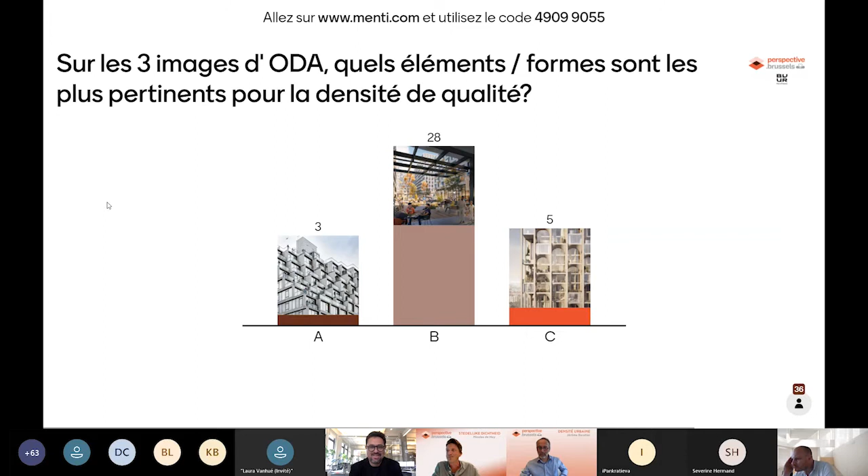Okay, well, maybe if you could tell us later on a bit more about project B, Eran, it'll be interesting to see why people are so drawn to it, maybe it's because they see trees, I guess. Maybe it's the best rendering. Thank you very much for this participation.

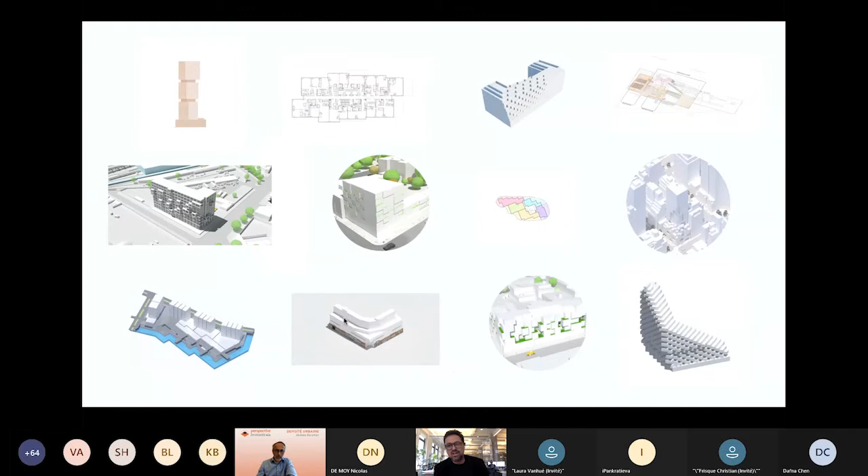...that we've been exploring the territories by which buildings can breathe, what we call the breathing room of buildings, territories where we can discover ways to expand our life and improve the qualities of our lives, starting at the very generic unit of living, is it apartments, to a building, to a block, and to a neighborhood. And it all started for me almost 20 years ago when I arrived to New York.

Basically with the vision of Jane Jacobs about the beauty in neighborhoods in New York, where there's a blur between the lines of privacy, intimacy, community, and public spaces, and how simple elements of architecture, like a window, a thick door, or a stoop of stairs, can become a platform for these kind of situations to be created, and how architecture can generate life that is intimate, familiar, but at the same token, diverse and public.

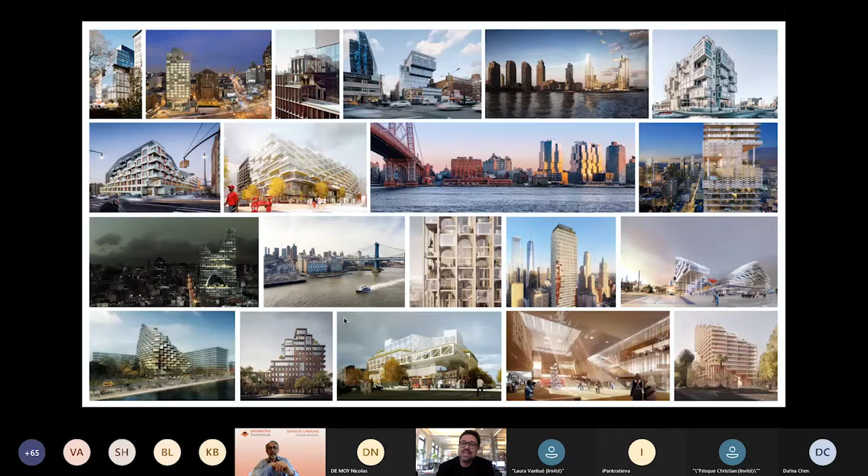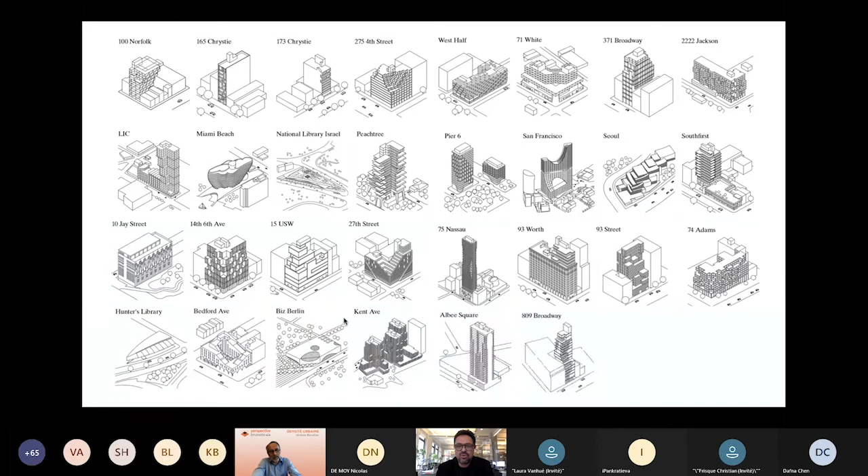And so what we go through at ODA is trying to imitate and maybe improve on these qualities as the city continues to densify, and those moments of intimacy at the streets are disappearing more and more. We've completed about 55 projects in New York City, and we're working internationally and around the world in diversified programs, scale, and geography. But what unites all of our work is the unrelenting desire to find formulas that improve people's life in cities, in every kind of function or every aspect of our lives.

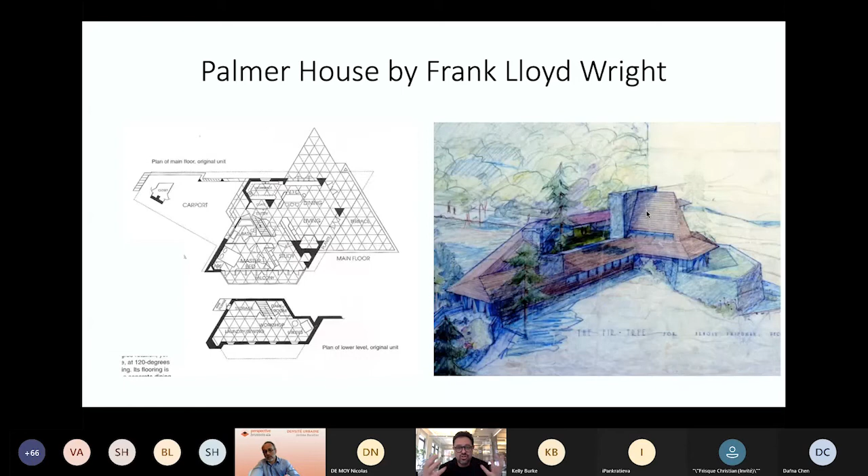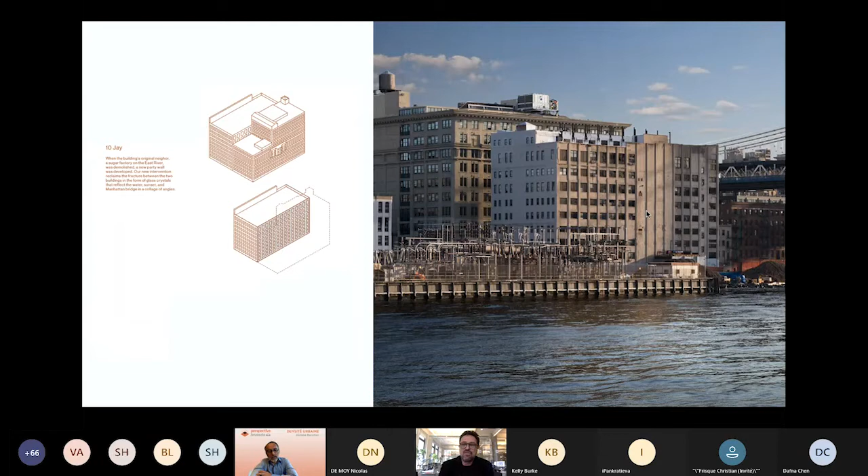So Frank Lloyd Wright, for example, built this house where from the pattern of the floors, to the column, the structures, the furniture, to the building itself, fractality is in play. We really like the idea of fractality in the city and the way it could reflect these qualities on humans. When we were asked to convert this fairly ugly building on the East River in a neighborhood called Dumbo in Brooklyn, we discovered that the building used to be a sugar refinery built by the Arbuckle brothers at the turn of the century.

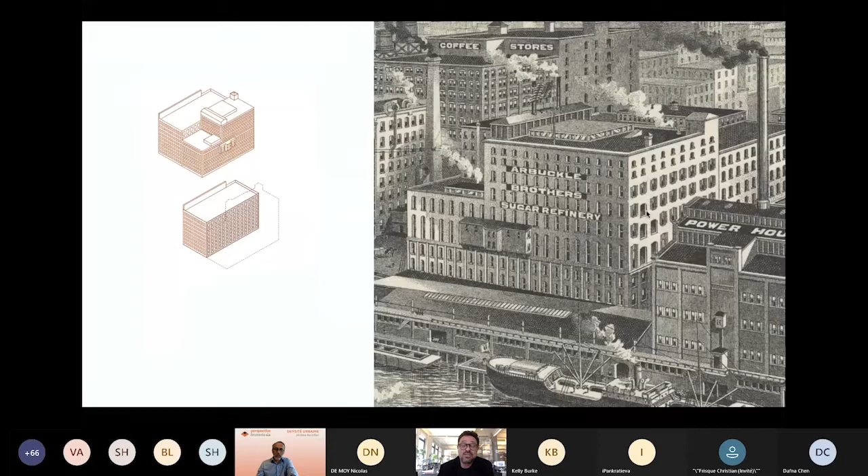And it was actually double the size. So sugar cane would come from Brazil on the East River, would download their product. The sugar cane would be refined and then continue north to Chicago through the Hudson River.

And we were intrigued by the idea of the fractal of a sugar crystal and proposed a facade that is highly fractal, a three-dimensional kaleidoscope if you will, that reflects the East River and Manhattan on the other side and adds a new level of complexity to an interchanging neighborhood with an adaptive reuse of an older building. We love that idea, and especially the way the modern kind of fractality adds to the overall context of the building on the waterfront.

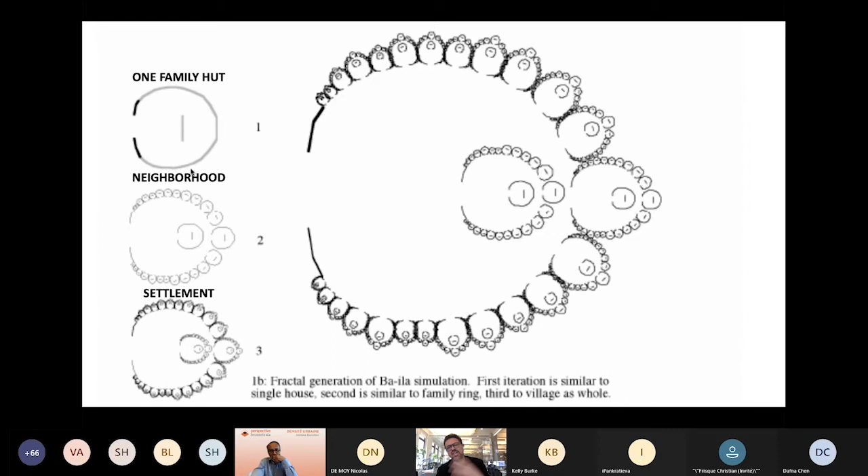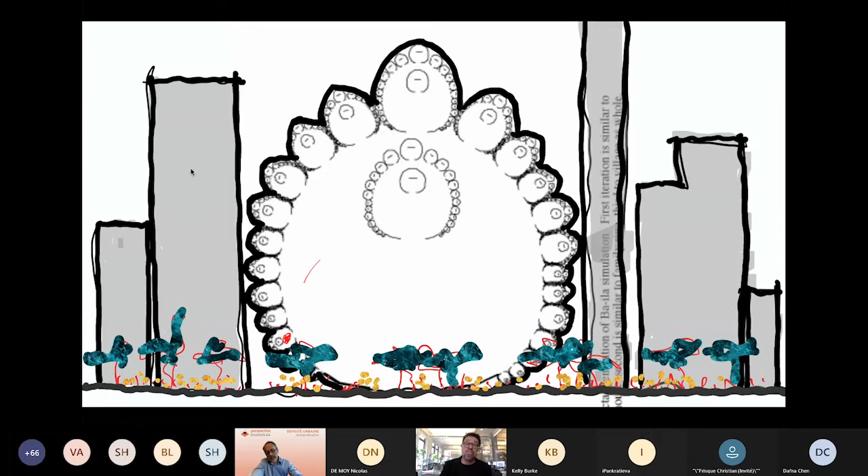So we're thinking, what if we take that idea and flip it and think about it as a building within Manhattan, such that the level of fractality would break the mold of the repetitive floor plates that just go on forever, and start to create fragments, small units of life that make our life within the building richer.

About 10 years ago, we discovered a small, very simple fact: that the zoning rules in New York City can allow us to take a typical building with a setback and rearrange what's called the dormer into a sort of random placement of fractal units.

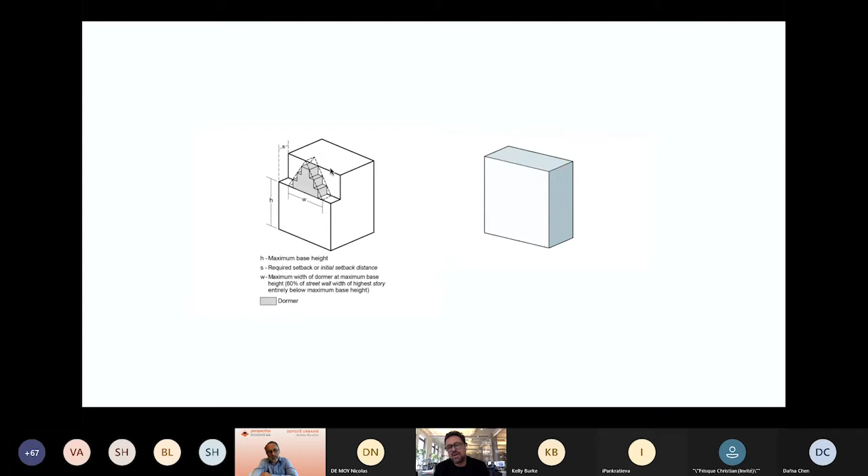This, we thought, would allow us to increase the amount of outdoor space at the top of the building, create very unique apartments, and expand the amount of exposure to natural light, air, and outdoor spaces.

And so we've taken that kind of fractal facade that repeats into bigger and bigger chunks and create voids within the building itself that we can insert our life into, creating homes that act more like a private house than maybe an apartment.

Multiple exposures, cross viewing between different rooms through the outdoor space, and such infusion of indoor-outdoor that improves not only light and air, but also accessibility to biophilia. And we thought that this idea is quite powerful.

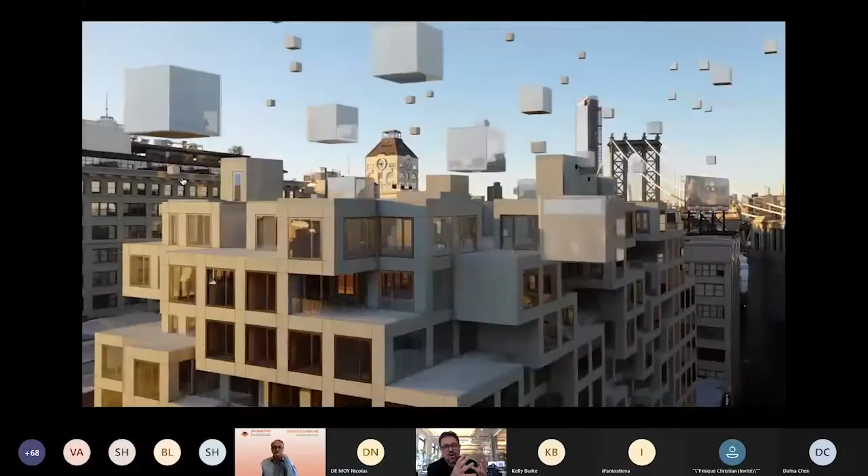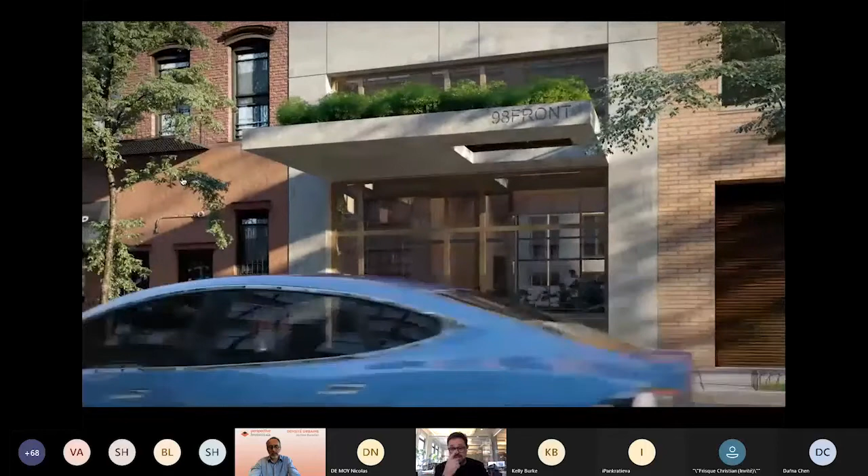Can we now duplicate it or build it on the extent of the entire building? We took the generic unit of a room, basically our most intimate form of living, in a project here in Dumbo, right by the Manhattan Bridge, and then composed them in a way that not only expands the apartment's access to light and air, but also creates this kind of mutual territory between neighbors that starts to create visual connection and physical connection between different units and parts of the building itself.

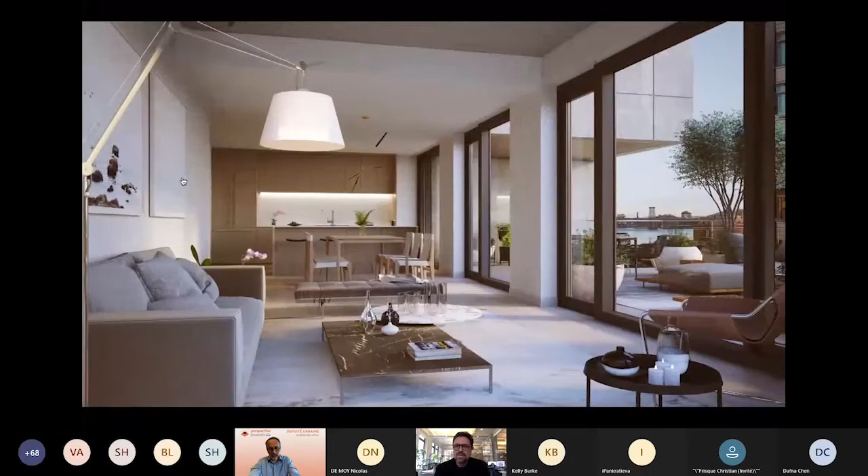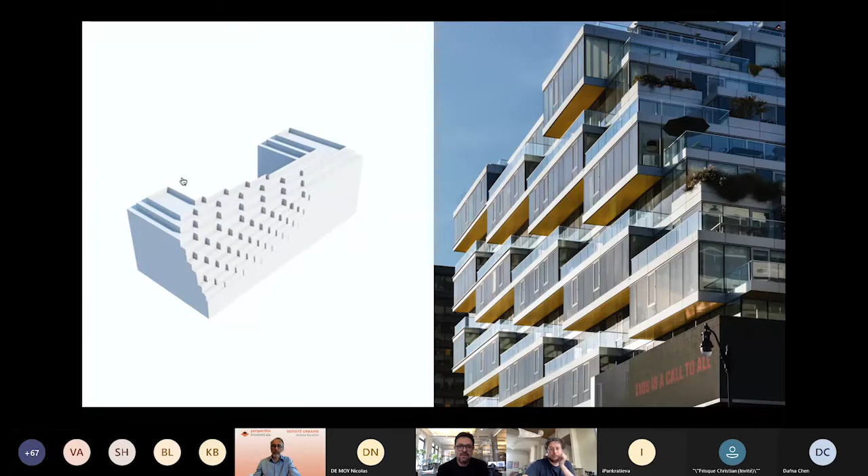The nice thing here, beyond the expansion of the units themselves and the sharing feeling of the neighbors, is the way the buildings start to communicate with their immediate environment.

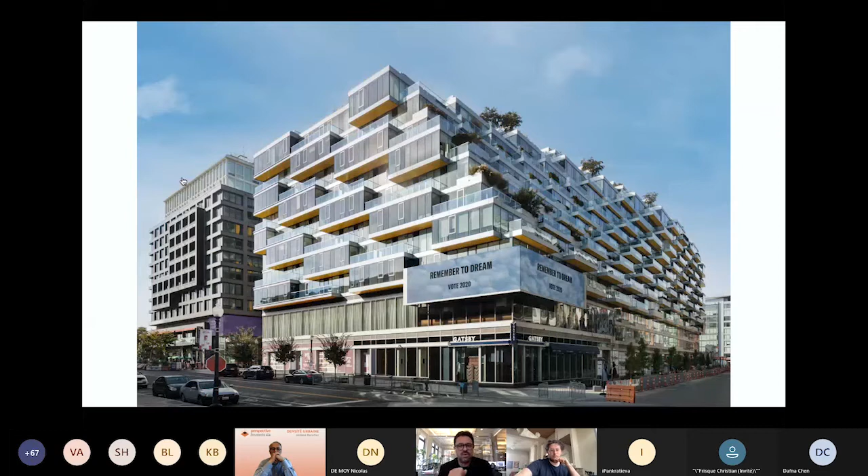So right across the street from here, there's a big stadium where they play baseball. Not only can the neighbors enjoy a sense of community in a more intimate fractality, but the building itself, as it cantilevers over to the other side, creates this enclosure, this intimacy for the tenants of the building through this garden, and then eventually opens up to the city itself, to the ballpark, creating this personal connection between people at their home, their neighbors, and the community at large in the city.

So what happens when we look farther from the individual building, when we look at a city block? We started developing these ideas when we had to design this building in Bushwick, a neighborhood in Brooklyn that brought high density to a low density community. We were asked to design 1,200 apartment buildings over 2 city blocks.

If you look at a typical New York City block, it's sort of a donut. What we proposed is to further break it down into smaller segments that create inner blocks within the block. Each one is a courtyard on an intimate scale, all interconnected at the ground floor and at the center connected to a public park. The roof of the entire thing became a huge 60,000 square foot, about 6,000 square meter, community park.

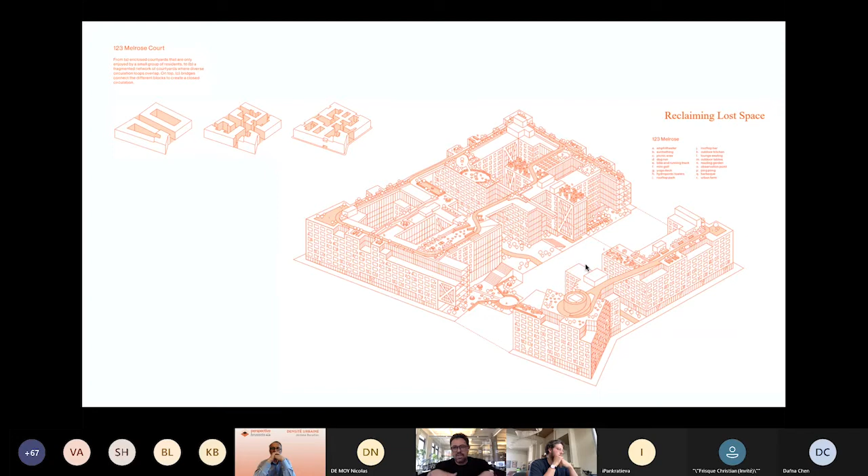So we have the public park, the weaving of the pedestrian courtyards, and the community park. That level of fragmentation, that fractality that grows into the city block, allowed us to really compose intimate courtyards that are only for pedestrians—both the building residents and the public community around—invited into this ground floor.

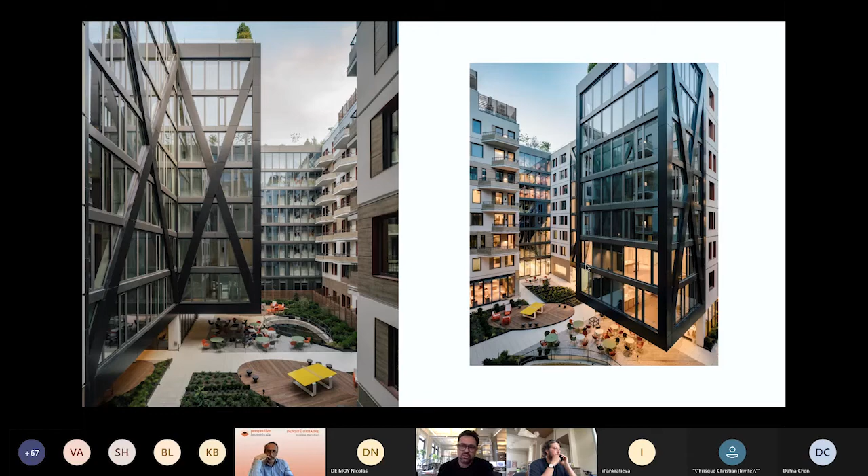At this point we started thinking that the traditional attitude to ground floor as retail, as a moneymaker for developers, should be totally changed. The future ground floor should be composed of the needs of the neighborhood, creating value to what's above. This sequence of courtyards allows people to wander around in a sense of familiarity, at different scales and different scales of group, to create communities and socialize as they wish.

Now, when we start looking at big buildings, we also look at big corridors. A corridor is one of the worst architectural features of modern architecture. We used to pay much more attention to corridors in historical forms of architecture, and today it's just a conveyor—they allow us to go as efficiently as possible into our apartment.

And we thought, how can we break that experience by bringing glass into the corridor, opening into these courtyards, creating visual connection, bringing natural light, breaking the journey, and then using the wall of the corridor as a canvas to create mega art within the project.

We've basically invited 13 local artists to create mega murals by hand painting them on the walls, telling the story of the community through its characters and through its culture, imprinted within our building and shared with the public through those openings in the corridor.

So this idea that a residential building, a housing building, can be much more than just places where people have an apartment. The roof itself is an amazing landscape at an amazing scale, but also broken into moments like urban farming. We have a greenhouse, mini golf, and just moments of visual contemplation with New York City in the background.

There is no sound there, Eran, I'm afraid. No sound? I'm very sorry about that, it worked earlier on, I don't know what happened. That's okay, so I'm going to just narrate it myself for you guys.

Can you hear me? Yes, we can. So while cities are expanding all over the world and super tall structures dominate our skyline, there's an increasing importance to reactivate our urban cores and improve people's life at the street level.

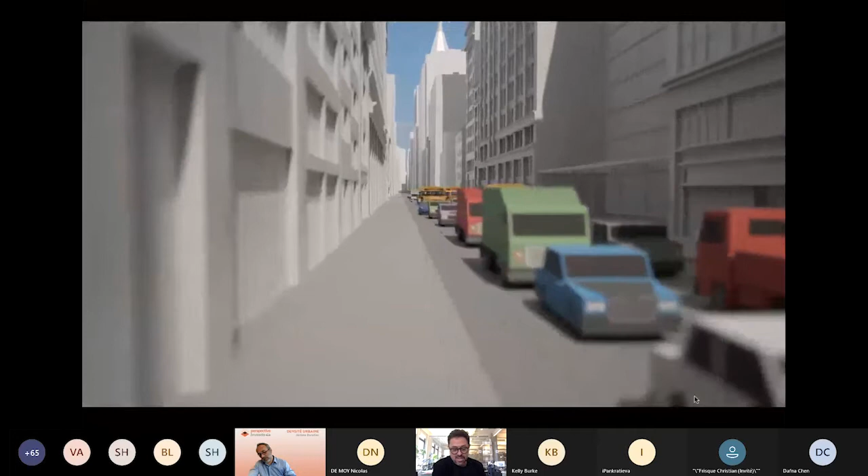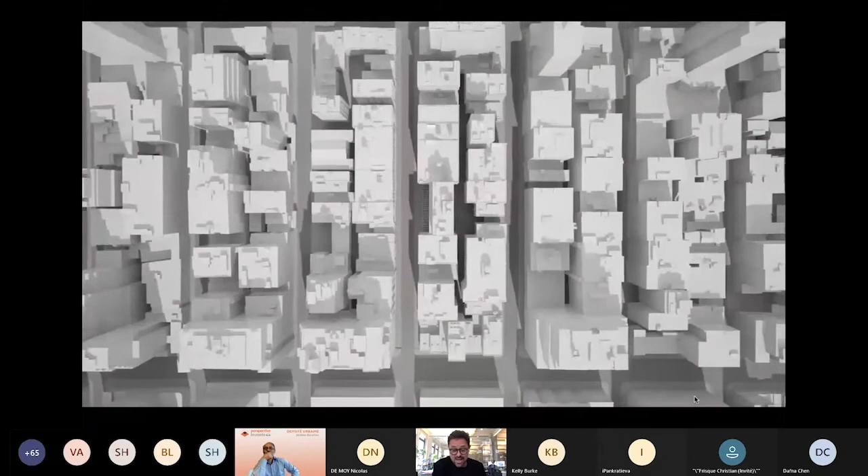We looked at the historical Flower District, located at the crossroad of iconic city landmarks and public parks in the heart of Manhattan, where community and commerce once flourished. This neighborhood, once filled with hundreds of flower vendors, has been struggling in the past few decades, as traffic and cars have come to overpower pedestrians, making it very hard to maintain a sustainable social and economic urban fabric. While the typical streets are not enough to sustain new density, existing city blocks have hidden courtyards that are privately owned and underutilized.

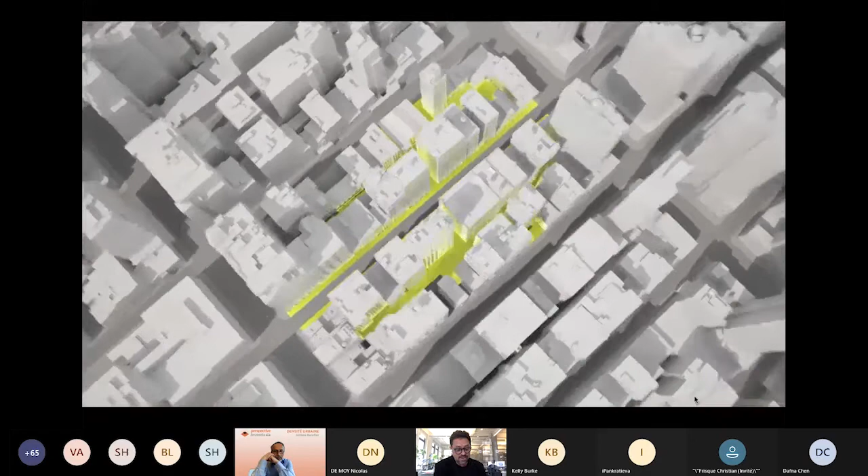We propose a new city regulation that will encourage developers to bestow interior courtyards and create new connections to the streets in exchange for an increase in floor area and height. As a result, the privately owned courtyards will be open to the public.

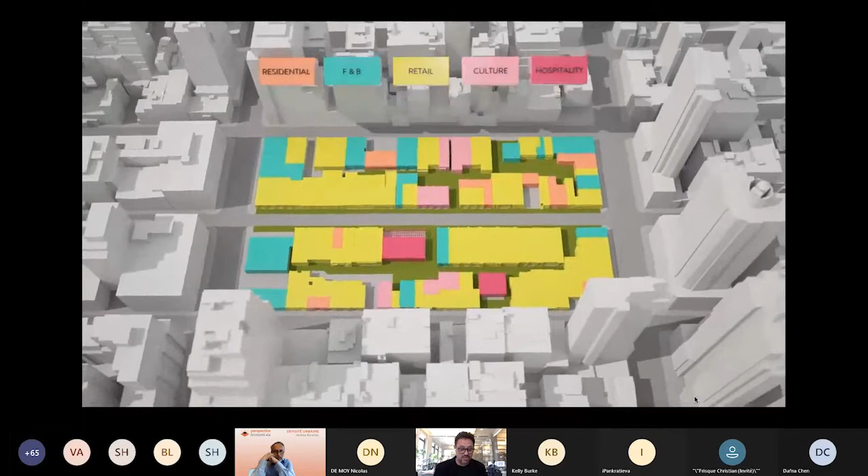Now imagine a typical block, where over time these spaces are being created and passageways connect them to the street, and the ground floor starts to flourish with functions like markets, small businesses, coffee shops, diversity of housing, hospitality, urban farming, public art, expanding the public realm and creating a new experience.

The new green web of environment will link one block to another and expand over time. And so what you see here in the video is an opening within the city block into what is currently a privately held courtyard that will become public in return for light and air at the top.

The retail at the ground floor now has not only the street front, but also the courtyard front that is totally pedestrian and could be shared by communities based on how they're programmed, from art galleries to urban farms to food and beverage, educational facilities for young kindergartens, after school activities, etc. This is an opportunity to create an expansion of what the streets cannot contain anymore.

Now, the beauty about these gardens is they become three-dimensional in the way they engage with the neighbors around. We have windows of the neighbors looking inward, like a typical European courtyard, but the linkage to the grid system of Manhattan allows us to enjoy both and not choose one or the other.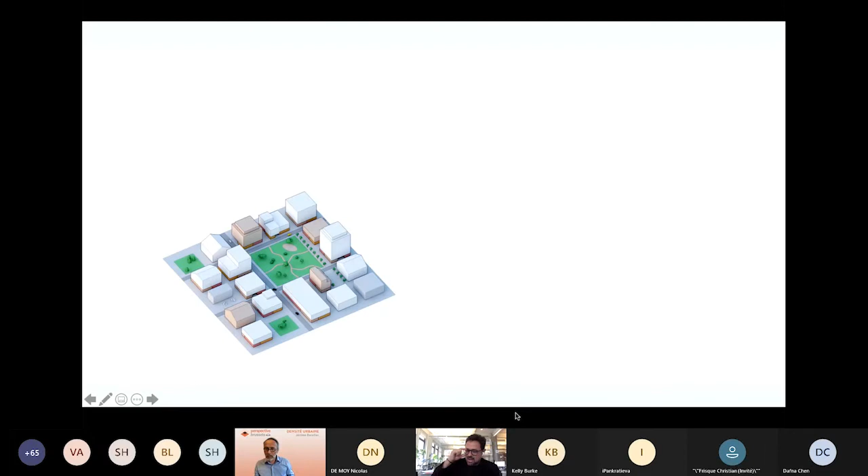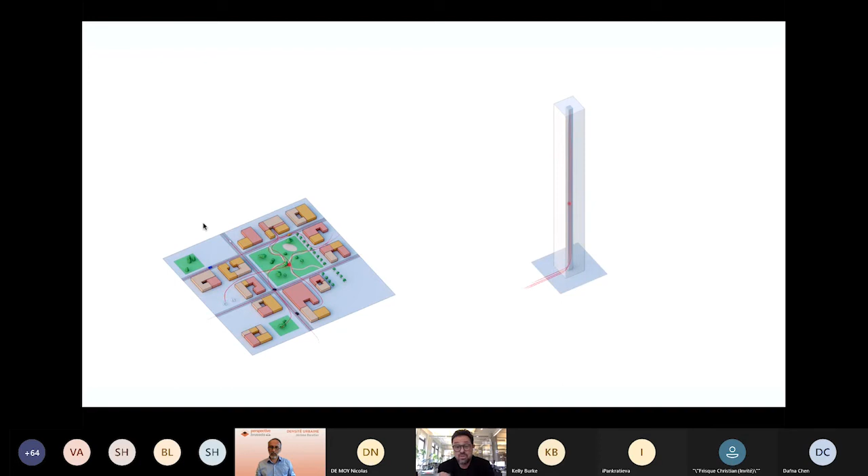I want to touch a little bit upon a familiar topic called the structure of a tower. Towers are very weird new forms of modern architecture, because essentially what they do is take a number of people that used to be a small community, and basically pile them up as a vertical stack, neglecting two things. One, the urban amenities we used to have as part of our everyday life - the local barber, the dog run, the little park, the pub. And second, eliminating our ability to have democratic and free circulation, replacing it with dead-end corridors and elevator systems.

So can we start to think about towers as a neighborhood flipped 90 degrees - a structure that is vertical, high density, small footprint, yet allows us to combine those urban facilities of that particular neighborhood within different levels of the tower, and somehow create a circular circulation that is more free.

We were asked to design a very large tower in San Francisco at an area on Market Street between the downtown and the sprawl of neighborhoods on the other side. And we were thinking, instead of building two towers on a podium, can we connect the two towers and create horizontal connections at different levels that would house those urban amenities we used to have in a flat neighborhood, but also create free circulation between the two cores and the passing through.

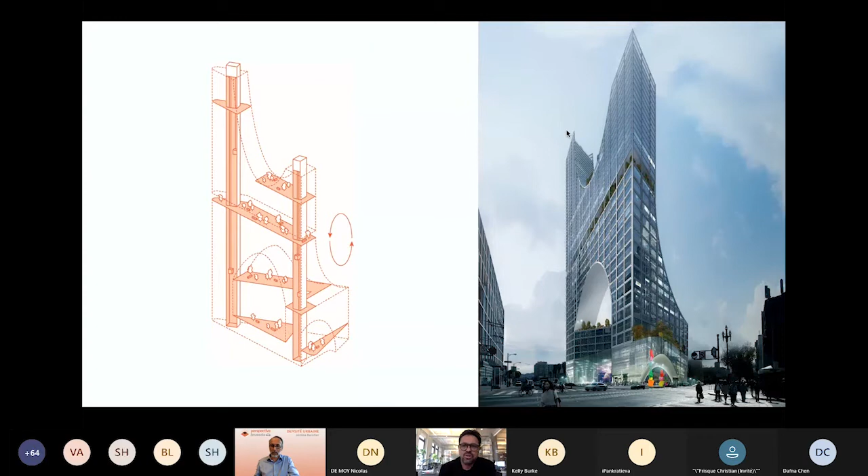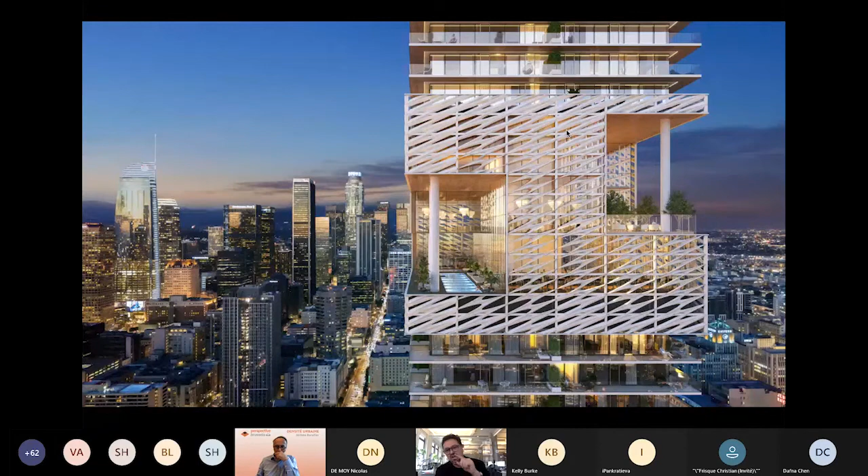We have different experiments in different towers. This is the tallest tower in downtown LA we're designing, where, while simple, it combines all of the amenities as a sort of community facility at the mid-level of the tower, allowing every person within the building to explore these amazing views, but also creating those pockets again of fractal communities and a visual connection with the rest of the city.

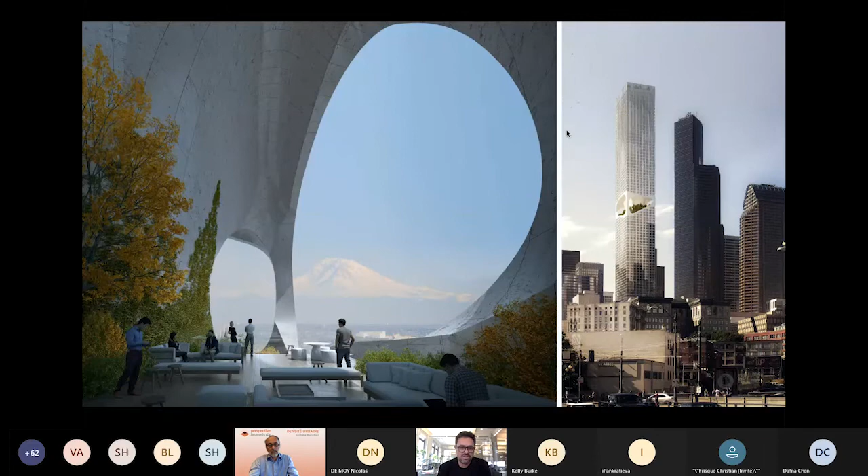And in Seattle, we're designing a community park that is elevated at mid-level and frames Mount Rainier, Mount St. Helens, and the Puget Sound on 360 degrees with amenities of the building, creating this kind of new experience of a park in the sky.

So how does it all come together when we look on an urban scale, when we're looking at more than one building, more than one block? I want to share a master plan we're doing in Queens. It's basically 5 city blocks that are currently either parking lots or single-story factory buildings.

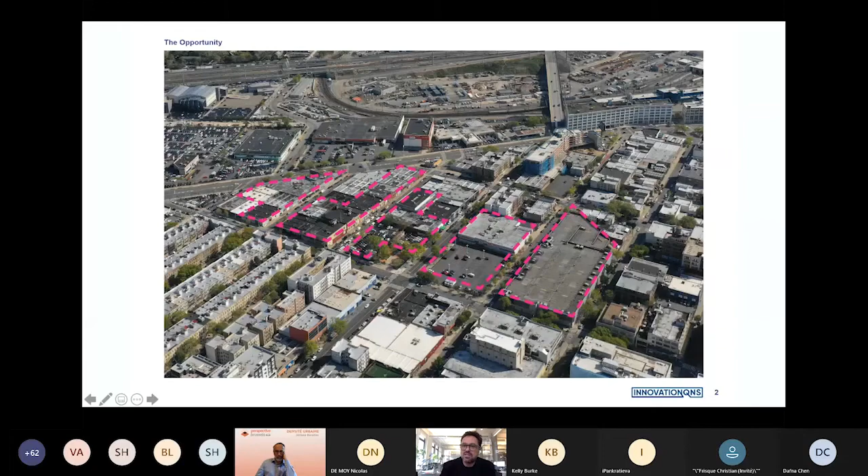Most of them are vacant in an existing neighborhood called Astoria. The first thing we thought was how we can accommodate the needs of the neighborhood, of the entire community at large, at the ground, the very narrow streets, and the retail along the street. We dedicated out of the privately owned property all of these green spaces in different scales that become a string of experiences shared by the community at large, from a large park to a marketplace, an urban plaza, pedestrian plazas, gallery gardens, kids' playrooms, etc.

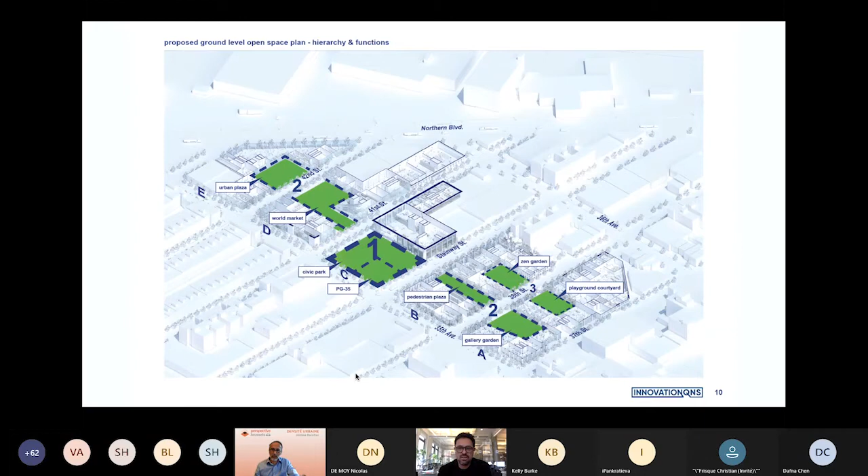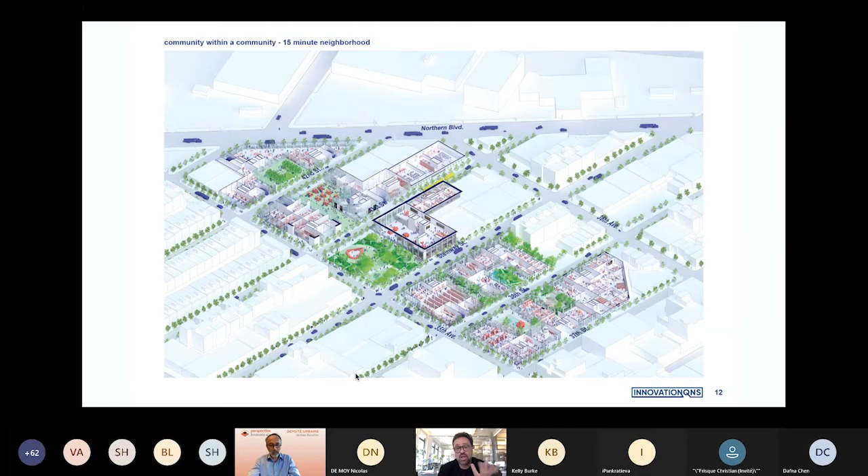Now, what's important is not just to dedicate the area, but to dedicate the entire ground floor as a program that serves this community at large and not necessarily just the bottom line, with the view that for the developments in the future, the value would come above because of the livelihood and strength of the neighborhood. So it will have retail, but with smaller components of mom and pop shops. It would have educational facilities and kids' areas. It would have culture and also a lot of sustainable factors. Essentially, this includes sustainability with 3 different buckets: the environmental one, economic sustainability for the surrounding neighborhood, and definitely the social sustainability.

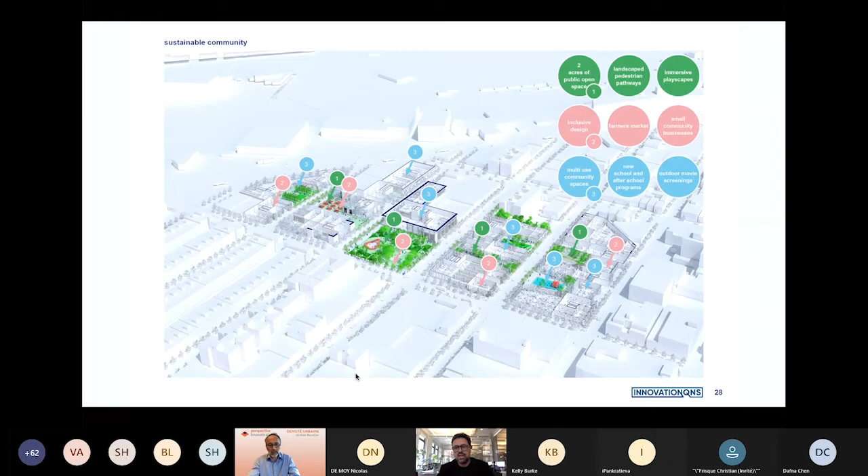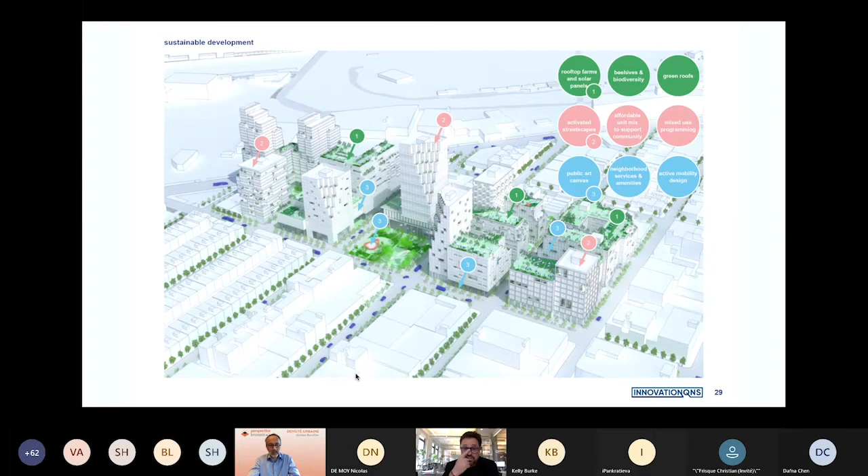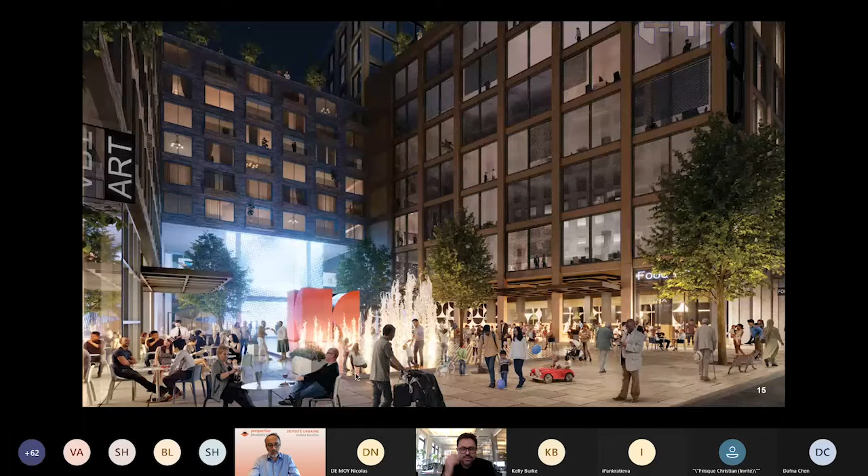So if you take a journey and look at these 3 buckets, how they interweave within the urban fabric, and then how they interweave within the entire massing as it goes vertically, we start recognizing the fractal elements as they grow within our city, from the small unit and their outdoor space to the entire building, the communities on the green roofs, the courtyards that allow different scales of intimacy into the bigger park. And if I go through a journey into this proposed neighborhood, there are discoveries along the typical streets where the street opens up into areas of communal gathering. It's really important to say that density is what allows this quality to exist. These courtyards would be empty unless the density above would revive it 24/7.

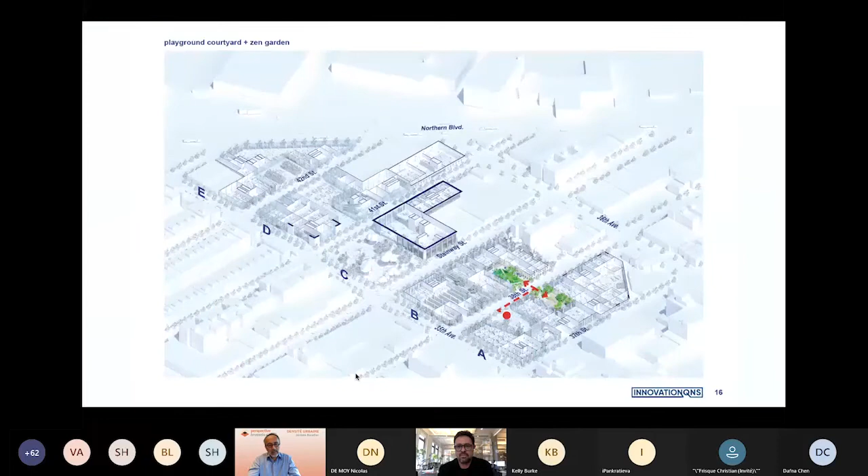And it's also important to program the different spaces to allow for that interaction, from office to hospitality, housing, cultural institution, educational institutions, etc. Here are the small family gardens, the kids' playground surrounded by childcare, and then the Zen garden surrounded by adult school, library, and coffee shops.

In between those, you see the typical street. Now, all of these are surrounded again with a mixture of programs. Here is the passageway that includes small retail shops that could be affordable for local business owners to maintain and sustain economical stability.

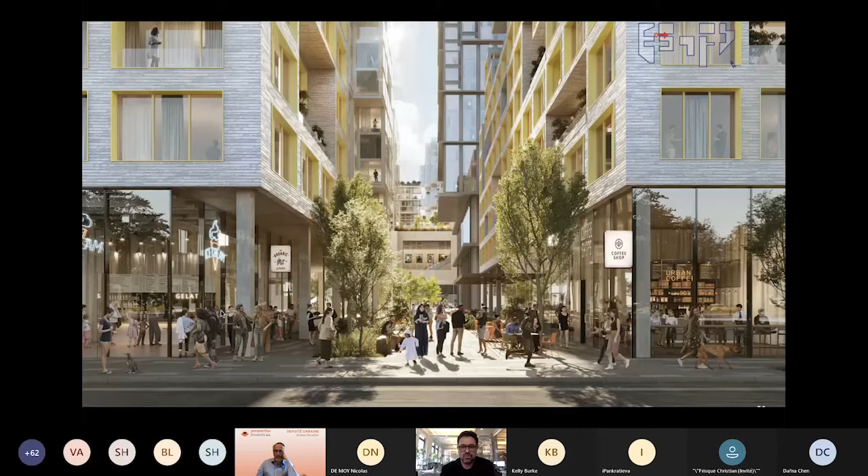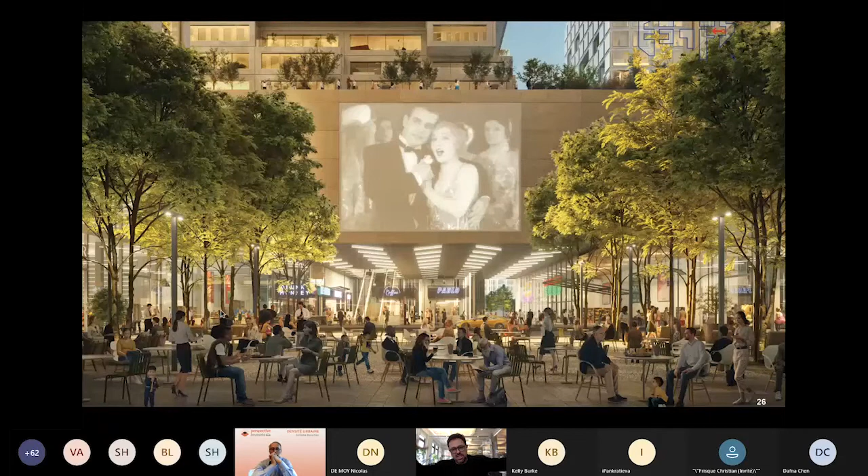The bigger green lawns for that particular neighborhood open up to a large-scale cultural institution in partnership with educational facilities in the area, creating a culture event, indoor and outdoor, around-the-year activation. On the east side of the development is the commercial zone, where we have an open market that is also covered to be used year-round. That links into the civic plaza where most of the office buildings are, the business center, and the cinema.

So I'd like to finish with a project that perhaps is closer to most of you. It's a project under construction right now in Rotterdam. It's going to be our first completed project in Europe. We're working on a few more currently. And what I love about Rotterdam is, to me, it resembles so much about New York in many ways.

First of all, historically, on the corner, the tip here at Hotel New York, ships used to sail after World War II from the Netherlands to New York and build many of the neighborhoods we know today in Manhattan. And because of the history of this city that was bombed to the ground, there's a new generation of density, and the city is looking for the right formulas.

We were asked to design—or actually we won a competition—to redesign the old post office, which is situated between the city hall and the financial center. The post office is a historically important building because it's one of the only structures that remained intact after the bombing of World War II. It's a national and city landmark, but it's been sitting empty for almost 12 years.

The idea was to combine a renovation of the beauty of the historical structure that used to be a beehive for people coming into this great telegraph room, and revive it again with a new program. The way we propose to do it is by creating a connection from that great hall through the building to a new courtyard we created all the way to the other side, essentially connecting two urban rooms.

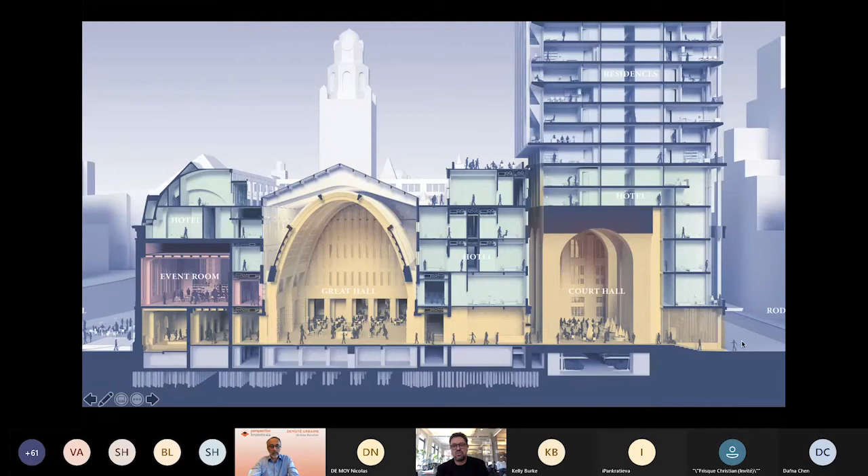Between the main street, called Coolsingel, to the street at the back, called Rodezand, where OMA has done a museum that is right now not in the mainstream passageway. If you look at the program of the building, it's a mixed use of commercial in red, residential in blue, and hotel in green. There's also offices and a convention center.

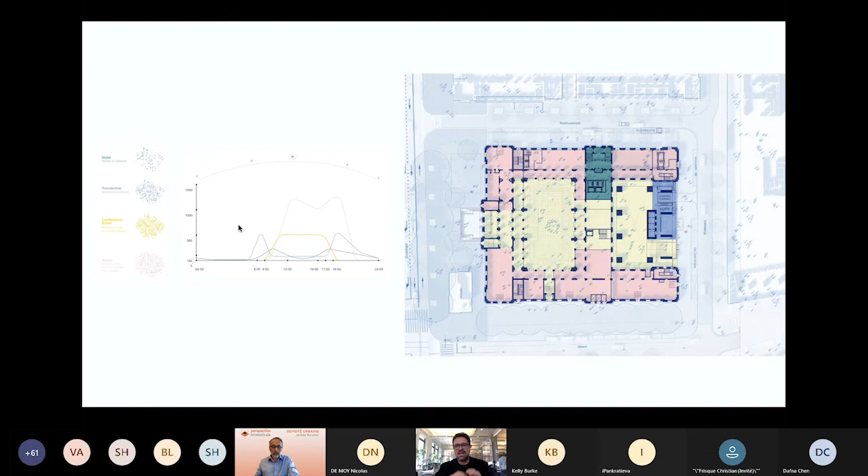The idea of the diagram on the left is how we meticulously program these things that will create activation of those big open spaces throughout the year and throughout the day. Hopefully this beautiful duality between the old and the new would encourage people to pass through the building.

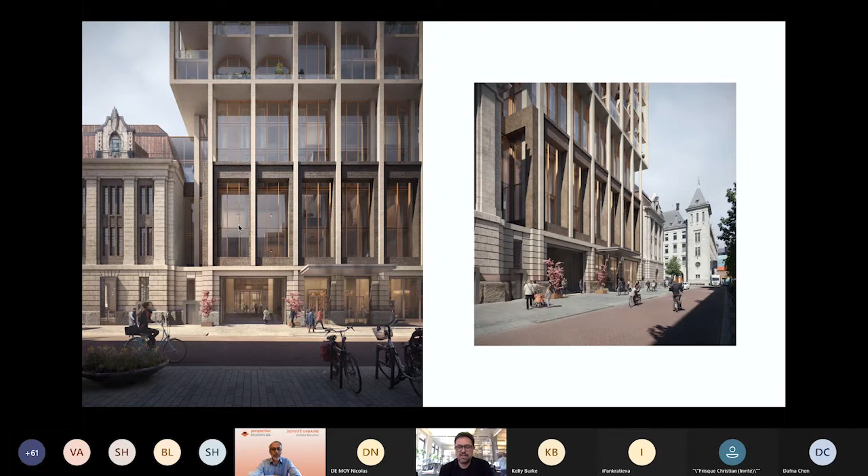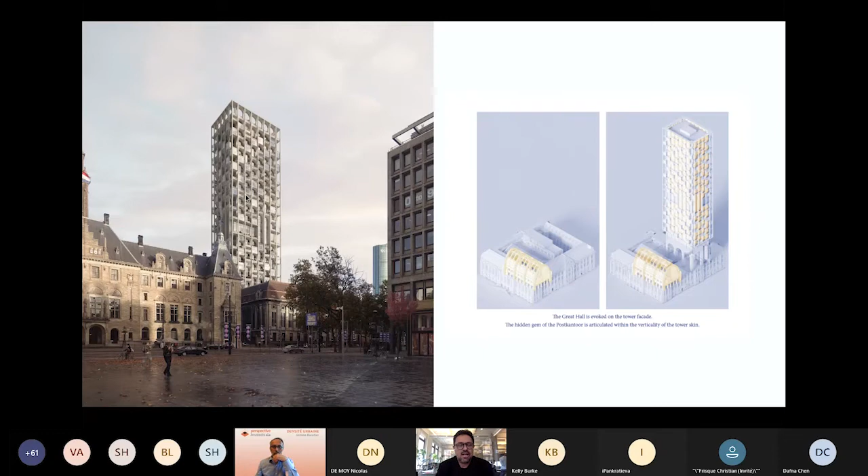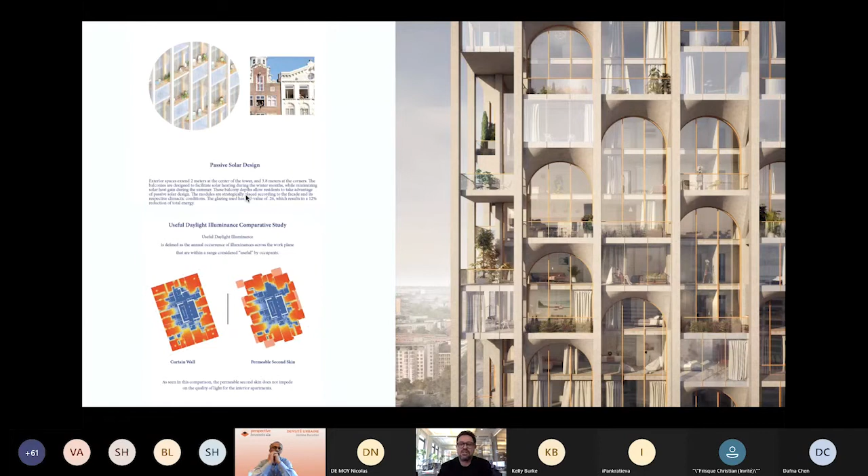Here you see the facade as the building lands, with architecture inspired by its historical part. Then as the tower rises on top of it, it's a tower whose core and foundations are conceptually lended through the historical feature of the building itself, but it's a very fractal and airy structure that promotes fractality, open space, natural light, a combination of shared airspace between neighbors, and perhaps a new form of living for a city that develops its density on the foundation of its history.

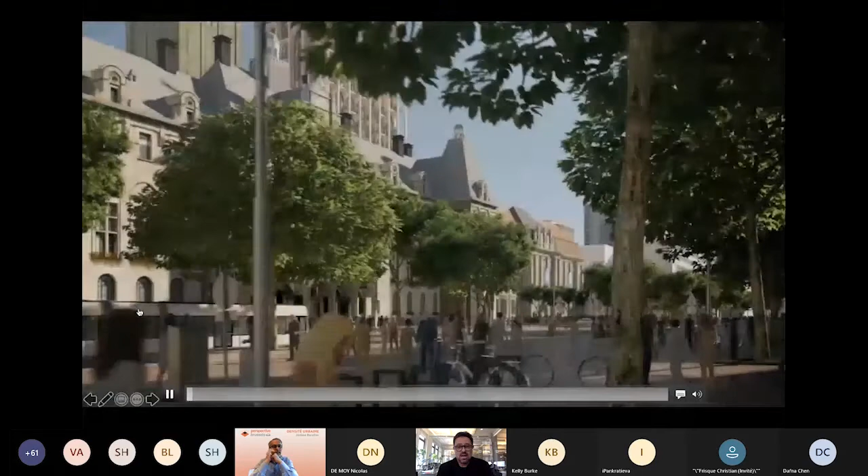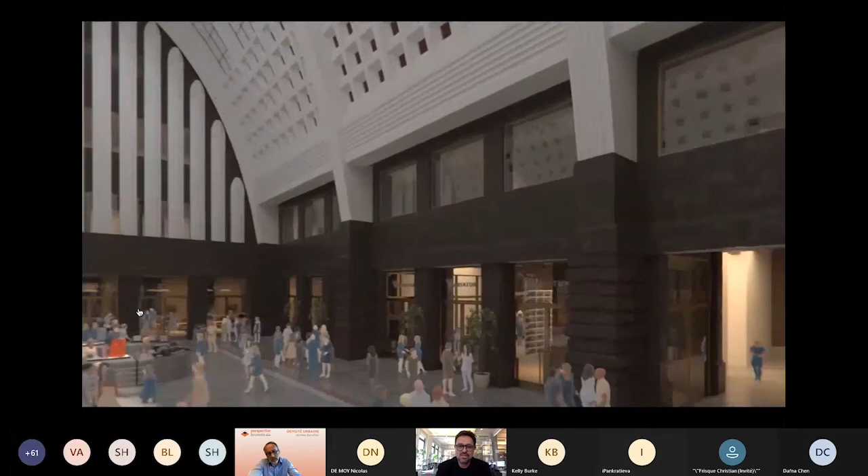As we look at this fly-through, I'd like to summarize by saying I believe the only way we're going to live as humanity in peace with Mother Earth is to continue and expand the wild areas of the planet, while we continue to consolidate and concentrate in big cities. By 2050, there will be 10 billion people on this planet. It's not just a choice, it's a matter of importance that we condense in big cities. But we have to find ways to do it that not only sustain us, but expand our horizons and give us physical and mental health, improve our quality of life with access to culture and other people, while sustaining our social structure so we remain intimately connected to our environment and to one another.

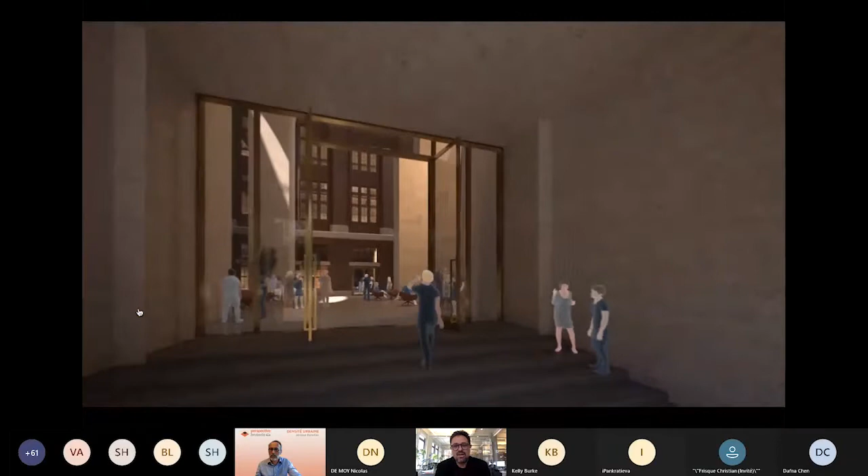What you see here is the exit from the new courtyard into the new entrance of the tower. You see the historical post office next door, and the sponge-like character of the tower itself, which allows wind to pass through it and outdoor spaces to collect water that can be used as gray water—a new expression of life for a physical vertical structure that represents perhaps the future of the city.

And with that, I'd like to thank you for listening.